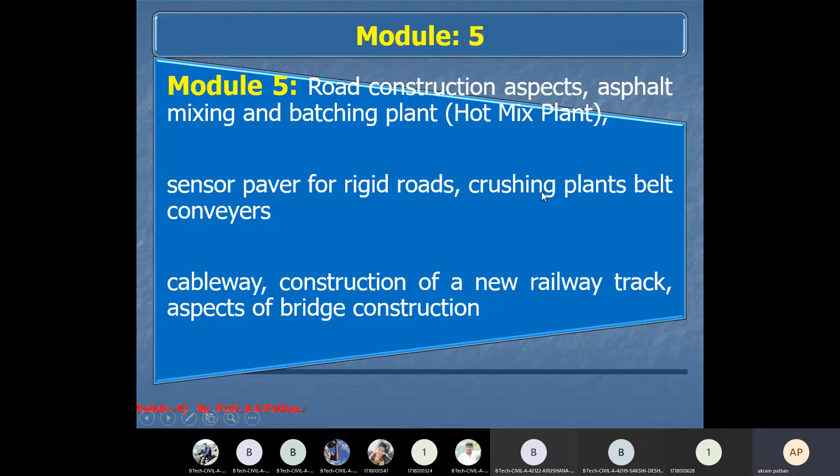I have already mentioned that the highway or the roadway is a system which is constructed above the ground level for the purpose of vehicle transportation.

As far as concerned with the transportation system, a good highway, or any type of national highway, state highway, major district road, other district road, or village road, should have good flexibility from the traffic point of view. There should not be so much obstacle for the traffic.

There should not be a high accident rate on a particular road alignment or the road. As far as concerned with this transportation system, we should follow all the requirements. There should be sufficient signals, sufficient crossing points, and sufficient width of the road systems.

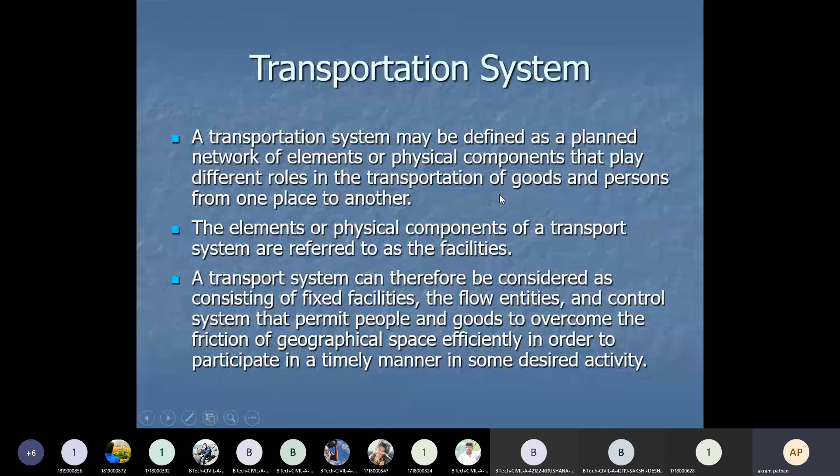Also we have seen that the fixed facility is one of the important aspects we discussed in the morning lecture. As far as concerned with the fixed facilities...

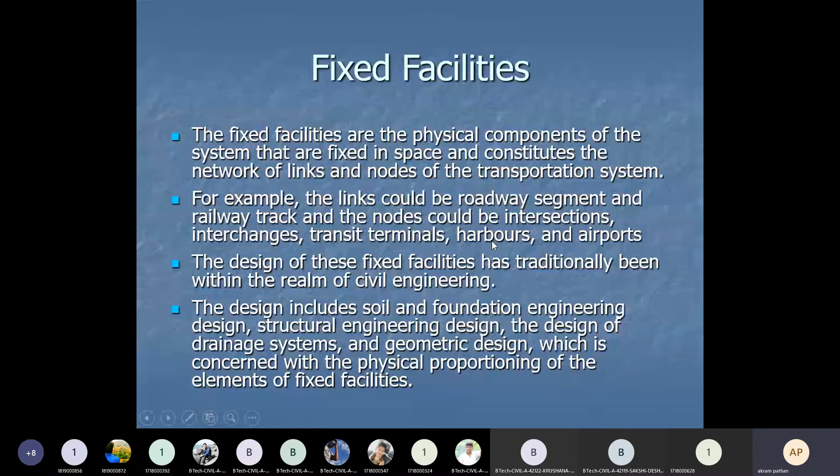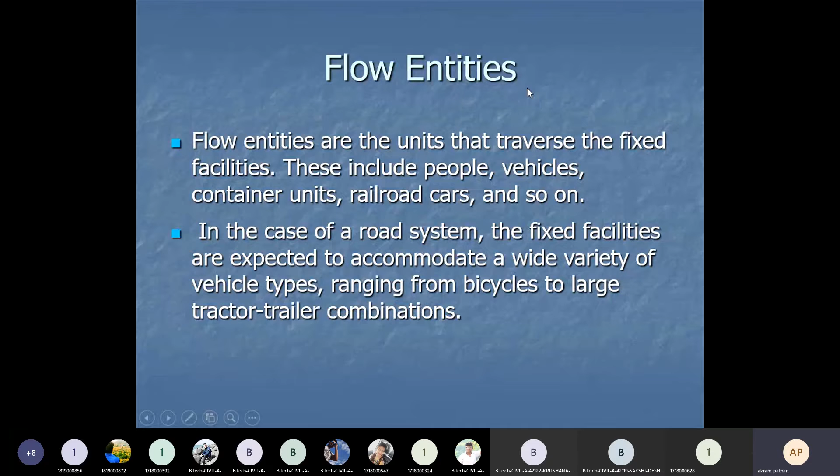Then another important aspect of road construction is the flow entities. We have also discussed control systems.

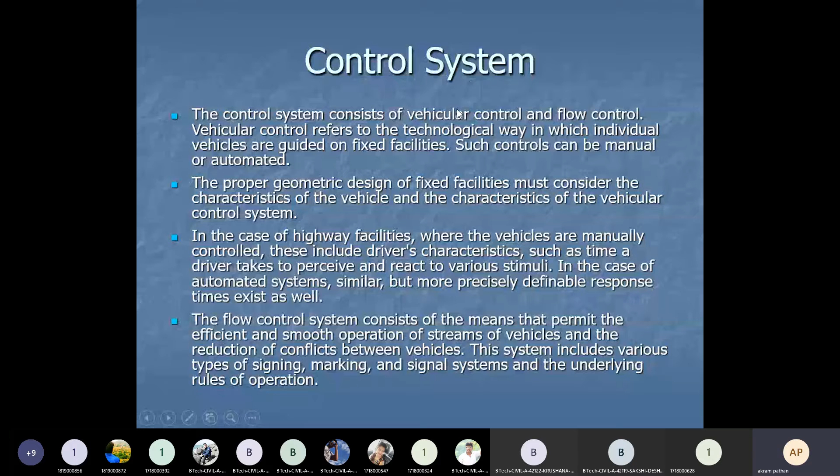In case of the road system, with the help of signals, marking, and signing, and the underlying rules fixed by the National Highway Authority of India, we should follow all the rules and regulations. Another important aspect we discussed in the morning lecture is mobility and accessibility.

Your road network should be accessible from all sources, meaning the road network should be easily accessible from a city area, market area, or any type of commercial or industrial area. So mobility and accessibility is feasible for all users.

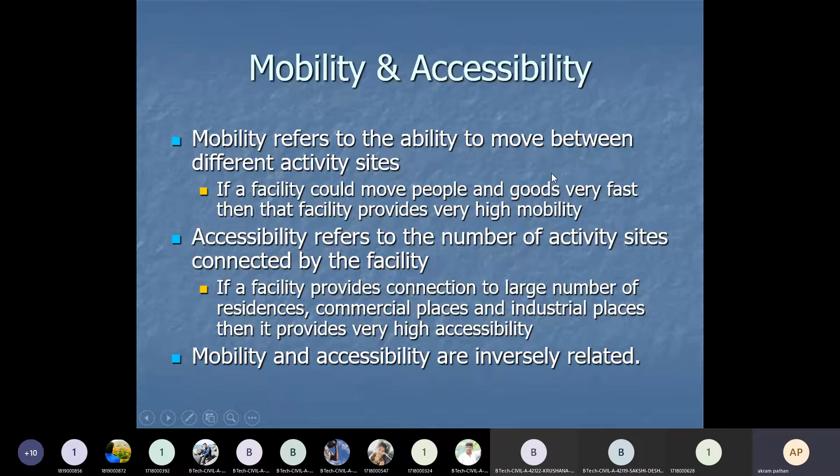Users may be the urban population, or people living in the urban area, who have easy access. Some industries are also accessible. Such aspects should be considered while aligning the road.

We also saw the major transportation systems: highway, railway, airway, waterway, pipeline, and conveyors. These are the 6 major transportation systems.

As far as concerned with highway and railway, or which transportation system we can use, the choice of transportation system generally depends upon 2 to 3 parameters or aspects, such as traveling time and cost or economy.

If you want to reach from origin to destination in very less time, one should go for airways, but that requires more money as compared to highway or railway.

Then waterway, transportation through ships. In case of harbors and docks, ships can stand just as railway stations or bus stands are constructed for stopping of trains and buses. In such a fashion we have docks and harbors where goods are handled and there is a station for ships.

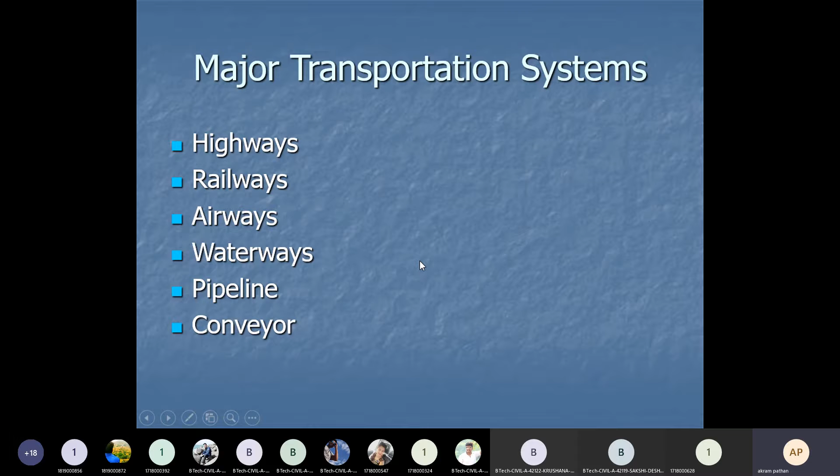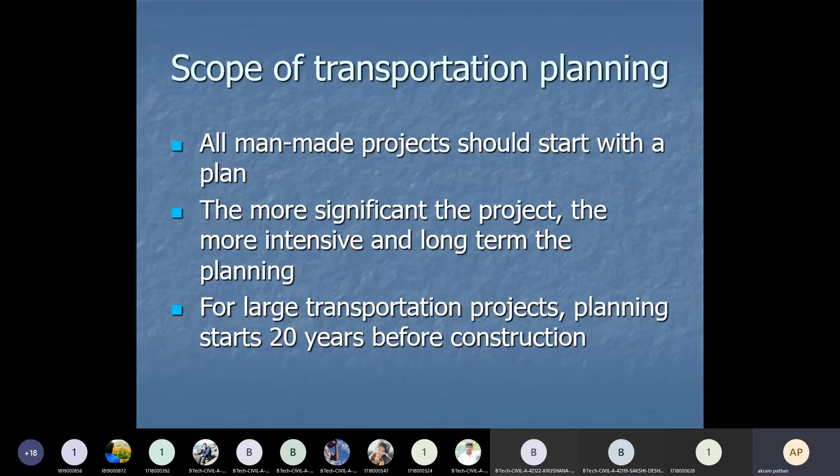The next important aspect regarding road network construction is planning. Planning is one of the important phases we discussed in the morning lecture. These are the processes in the planning phase of any road network. First we should understand the situation where generally we require the road network, and then we should understand the problems.

So what type of problem will be there? The problem is related with land acquisition, or the problem is related with the alignment - on which point the alignment should pass or should not pass. Once the problem is defined, we need to search for the solution depending upon conditions on the field, and then go for analysis of performance and evaluation of alternatives.

So certain alternative planning should be there as far as concerned with the total construction cost point of view. We should have alternatives, and then choice of the project, and then design and construct. So these are the processes we should follow in case of road network planning, and then with other stakeholders what we need to do.

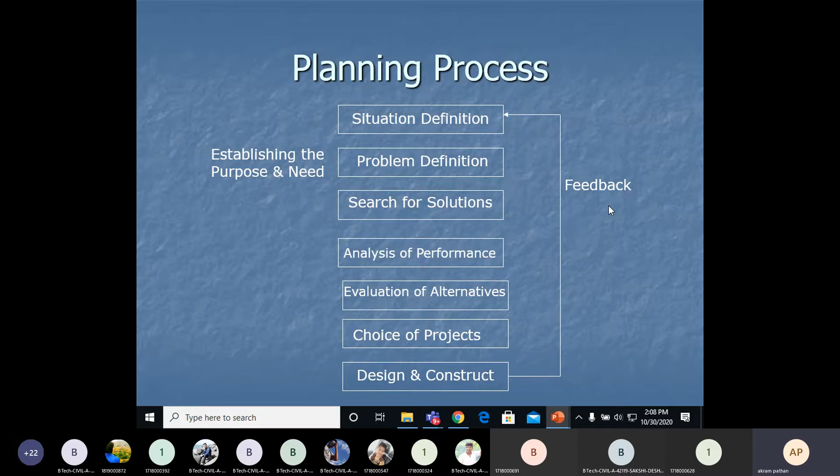Then what we need to do is take the feedback from all the stakeholders - may be the government authority, may be the local agencies. So from that we have to take the feedback, and if you satisfy your feedback for all these planning processes, then the feedback system is very essential for the planning process.

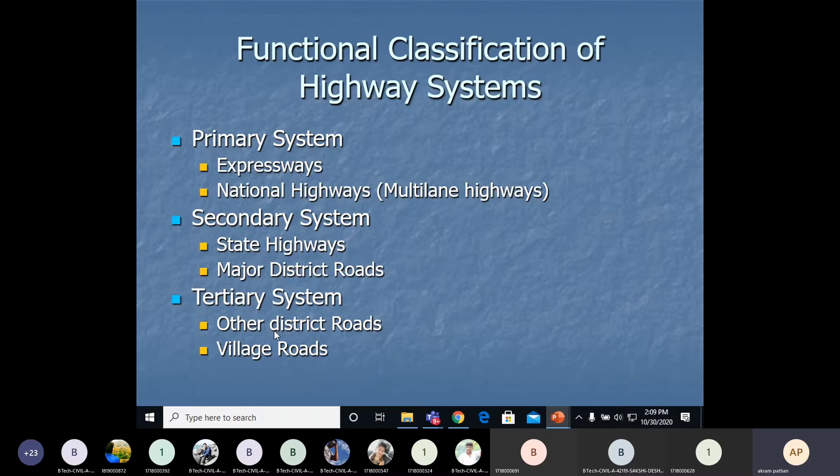Also we have seen in the morning lecture the classifications of highway systems. Basically we have three major systems: primary, secondary, and tertiary systems regarding classifications of highways. As far as concerned with the primary system, we have the expressway, then national highway with multiple lane systems. Then we have the secondary highway, that is the state highway and major district road, and tertiary system which includes other district roads and village roads. So these are the systems of road we should understand first.

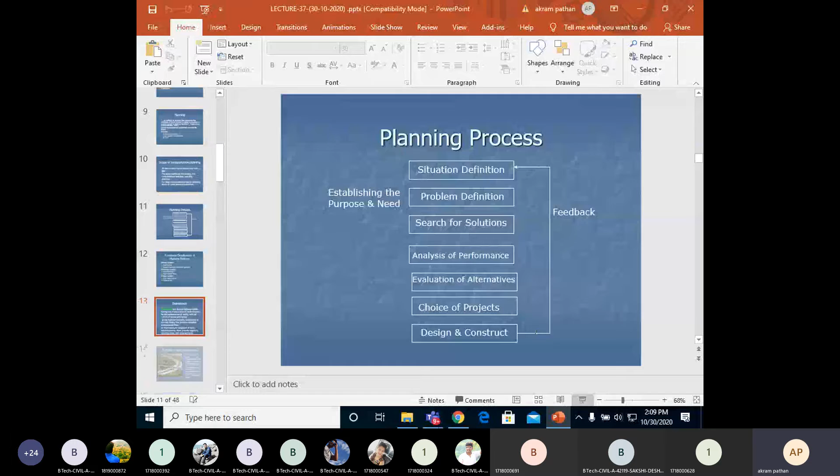Then as far as concerned with the expressway - expressway is a divided highway facility, having two or more lanes in each direction for the exclusive use of traffic with full control of access and egress. In the highway hierarchy, expressway is the only facility that provides complete uninterrupted flow. So such kind of facility will be there in case of the expressway.

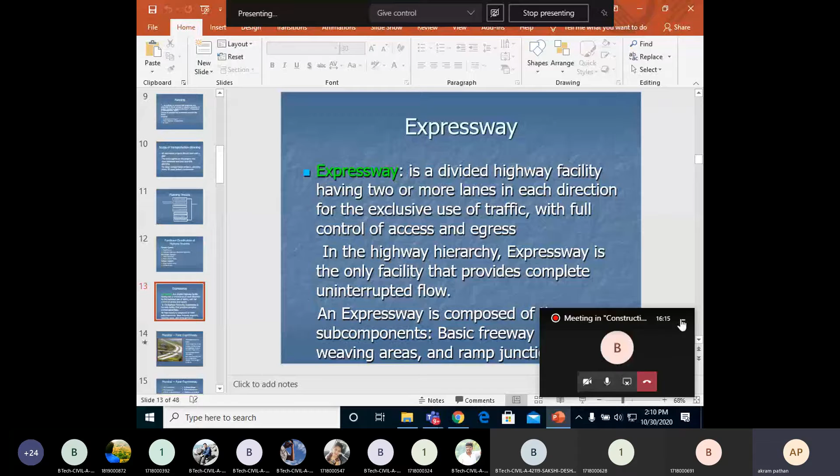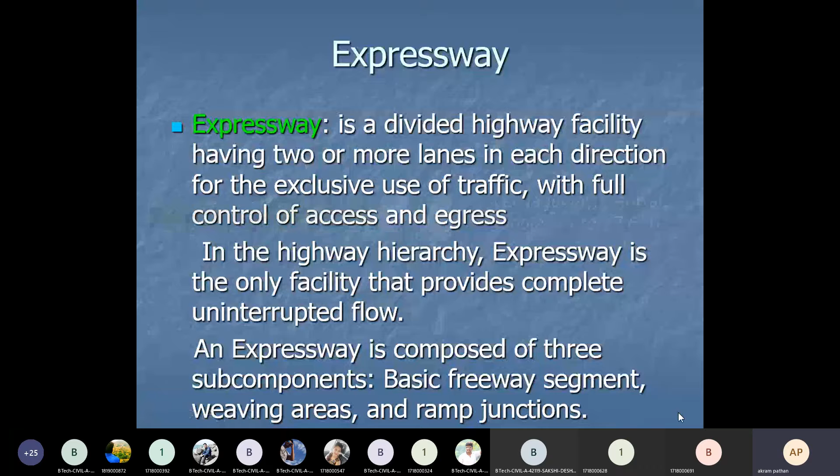We should also understand an expressway is composed of three components: basic freeway segment, then weaving areas, and ramp junctions. So basically in case of the expressway we have three sub-components, and we also discuss regarding the Mumbai Pune expressway. So in front of the Mumbai Pune expressway, these are the various major constructions that will be there in front of the alignment.

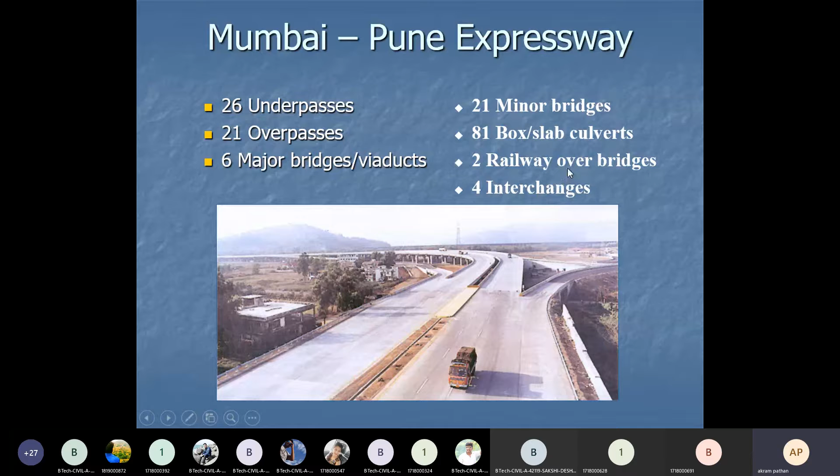There will be 26 underpasses, 21 overpasses. Then 6 major bridges and viaducts, that is the culverts, and 21 minor bridges which are constructed across the Mumbai Pune expressway. Then 81 box or slab culverts. Then 2 railway overbridges we have constructed in case of the Mumbai Pune expressway. Interchanges will be there. So such kind of constructions we should follow in case of any type of expressway. So these are the components of any type of expressway.

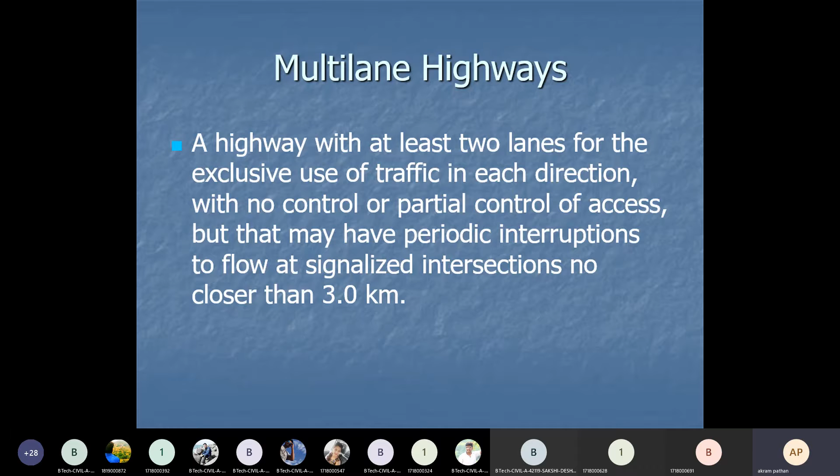Then multi-lane highway. Basically in case of the multi-lane highway, a highway with at least two lanes for the exclusive use of traffic in each direction, with no control or partial control of access, but that may have periodic interruptions to flow at signalized intersections no closer than 3 kilometers. So in case of multi-lane highways, at least two lanes should be there, and intersections no closer than 3 kilometers. So at the junctions we should follow signalized systems, we should follow intersection systems, and this is no closer than 3 kilometers.

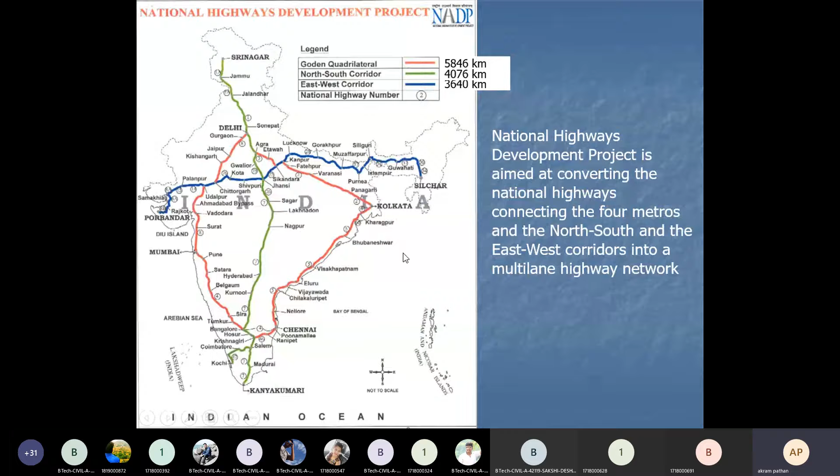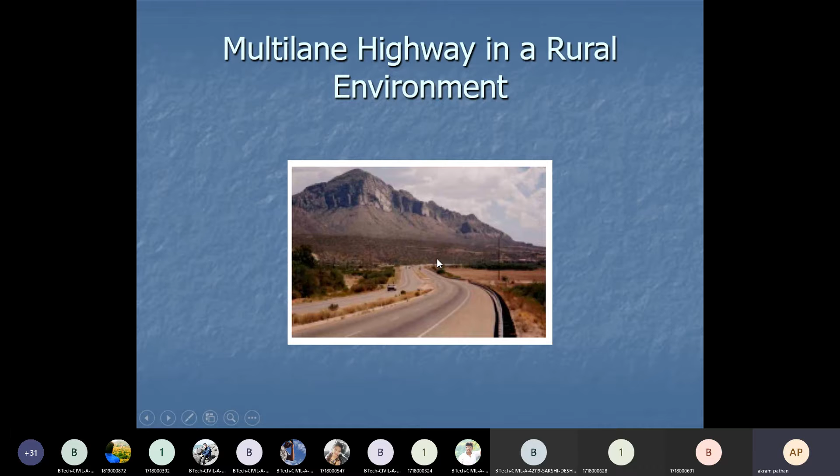As far as concerned with the multi-lane highway, it is going on in a rural environment also. In case of hilly areas, the multi-lane highways go through the hilly areas also. Then see here the suburban environment. This is the picture showing the multi-lane highway in a suburban environment.

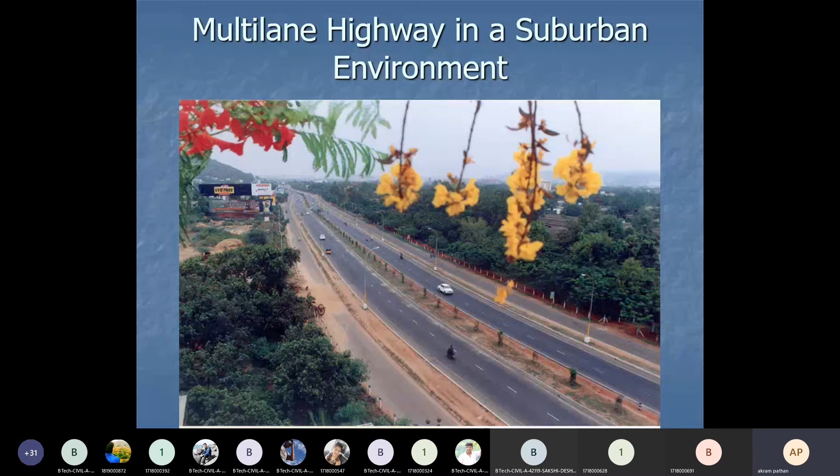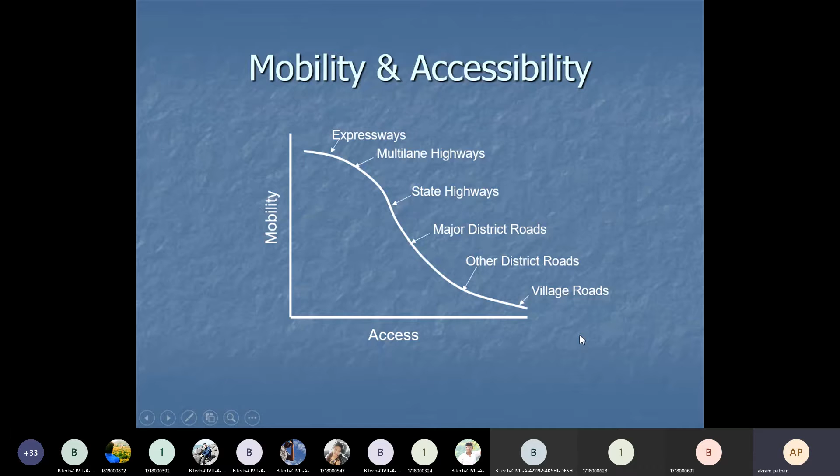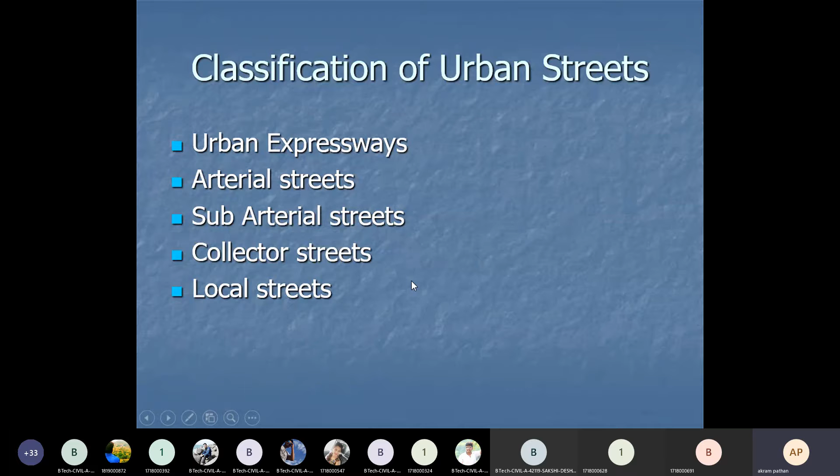Then we should also understand the classifications of the urban street. In urban areas, we have classified urban expressway, arterial street, sub-arterial street, collector street, and local street. So the urban street is classified into types of road networks in the urban areas.

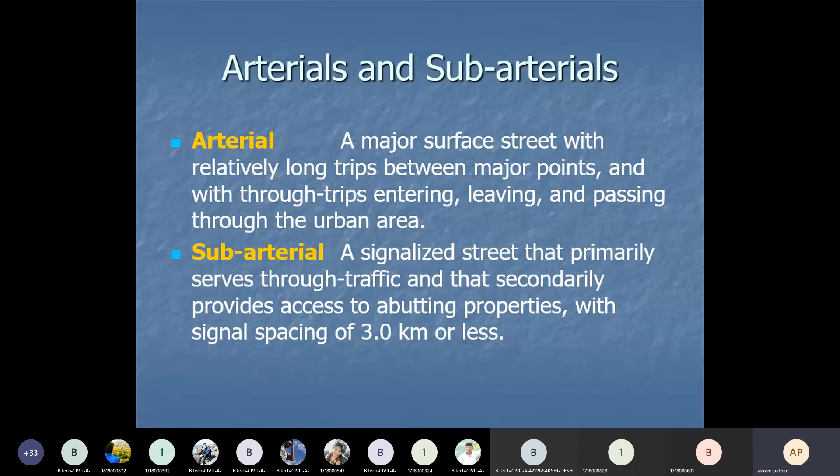Then we should also know about collector and local streets. As far as concerned with the collector street, it is a surface street providing land access and traffic circulation within residential, commercial, and industrial areas. The function of the collector street is to collect traffic from local streets and feed into the arterial and sub-arterial streets, or vice versa. The access is generally provided within residential, commercial, and industrial areas.

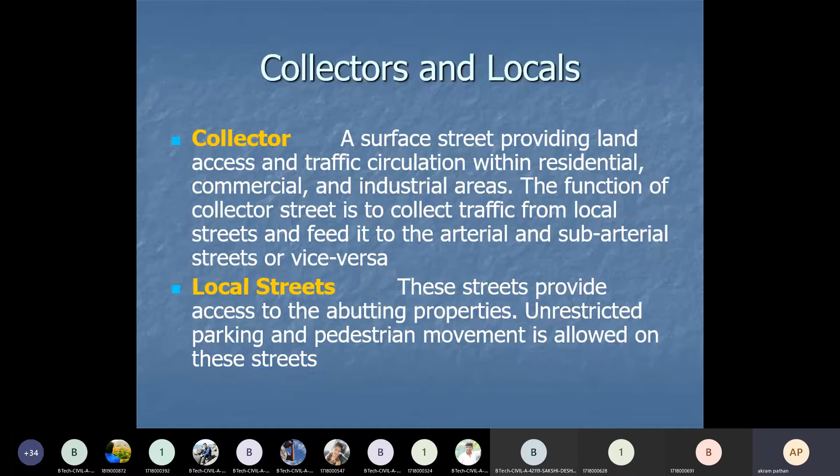As far as the local street is concerned, these streets provide access to abutting properties, with unrestricted parking, and pedestrian movement is allowed on this particular street. Pedestrian means people walking on that street. Such a street is known as the local street.

Then level of service will be there. We have categorized the urban street into class 1, class 2, class 3 and class 4. It's a qualitative measure describing operational conditions within a traffic stream based upon service measures such as speed and travel time, freedom to maneuver, traffic interruptions, comfort and convenience.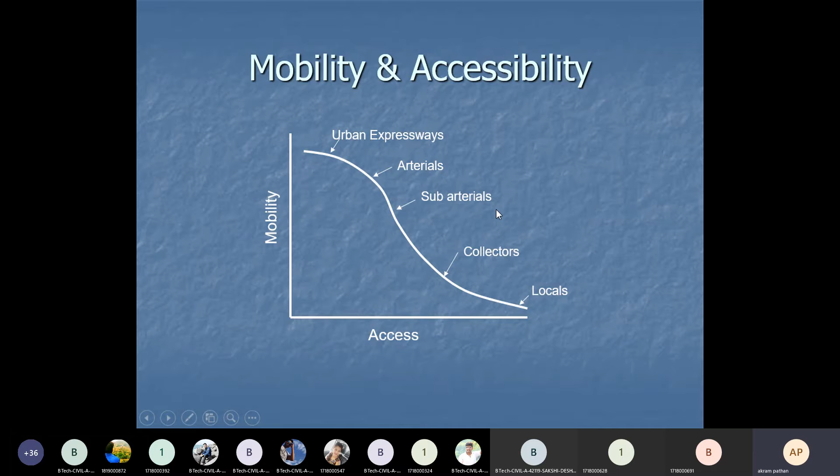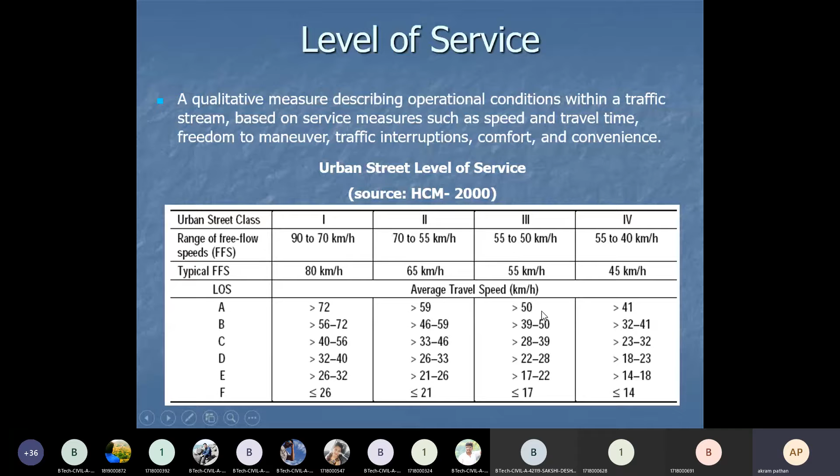Depending upon the national highway, state highway, major district road, other district road, or village road, the thickness and camber and all the geometry of the highway element changes according to the classification of the road network.

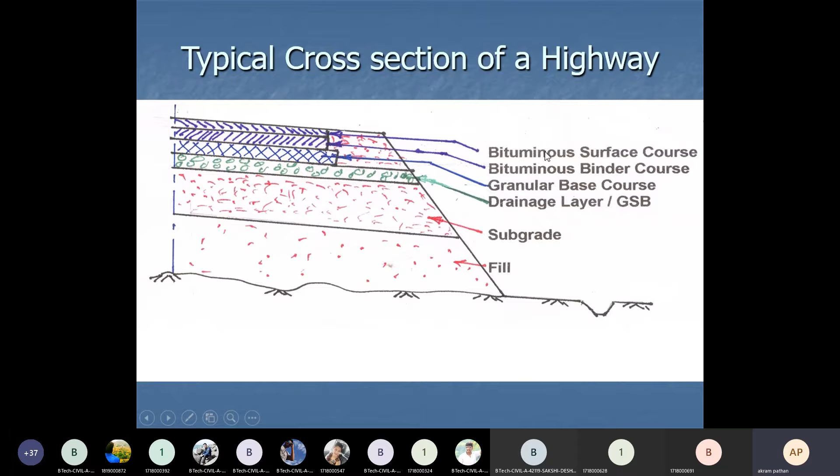So which type of material is generally used for the compaction of the subgrade? Which type of material is generally used to fill the drainage layer, sub base course, base course, or the wearing course?

As far as these four elements are concerned, these are very wide areas, but in our subject only the aspect will be covered, not in depth—though we should understand various aspects whatever this slide is going to cover. This is very important as far as the first part of our subject is concerned, but not in depth. Geometric design is a very wide area which you will cover in infrastructure engineering, but as far as the depth of our subject is concerned, you should understand the various aspects we should consider in case of the road network.

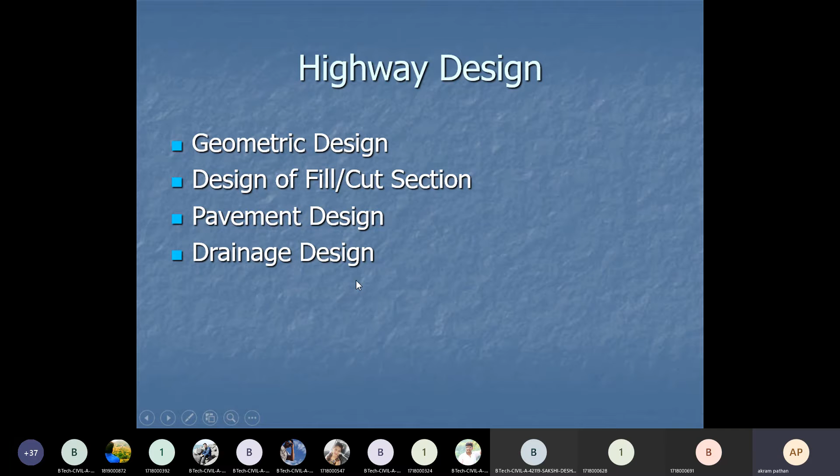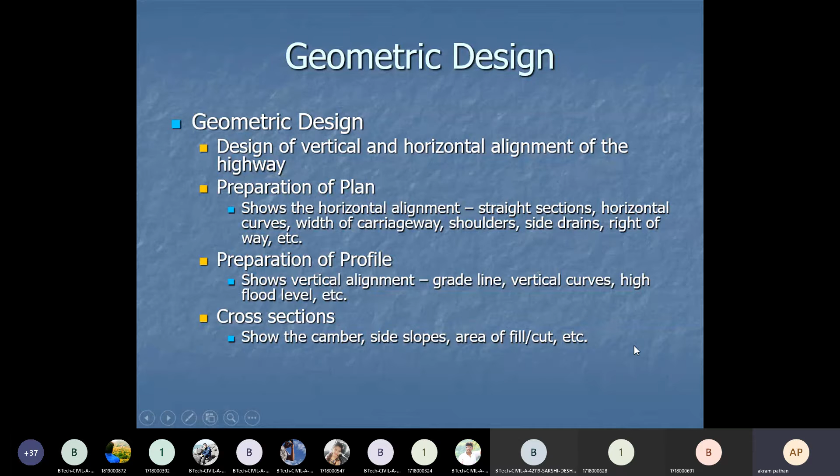So these are the considerations we should follow in case of the geometric design of the highway. As far as concerned with the geometric design, these are the elements we should look into in detail. Then this is a cross section.

This is the alignment. We need to do the survey. We need to mark the positions on the ground network or the ground level, and then we need to draw the cut and fill, and then we need to draw layer by layer, that is the subgrade, base course, and the wearing surface.

So whatever sheet we have developed, or we have constructed, in case of the survey, you can say the highway design and cross section in surveying follows the same method as the preparation of the cross section of the highway.

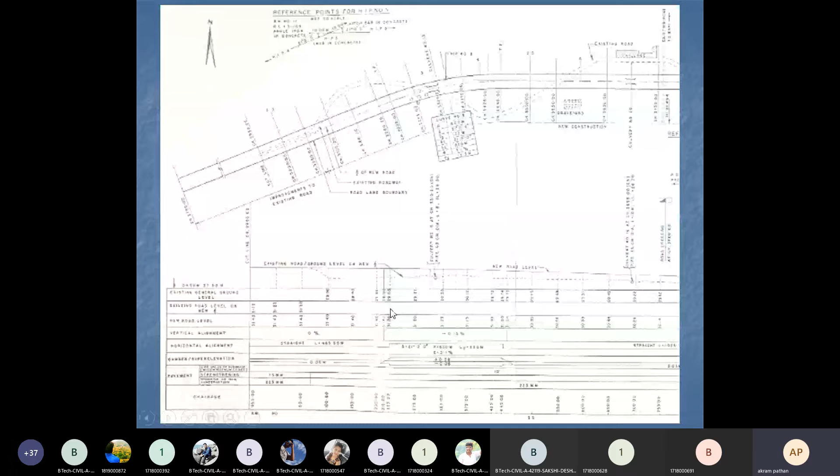Then look at this, we also draw such type of cross section. We have the road level, these are the depths, and this is the carriageway, this is the camber we have kept for drainage of rainwater from the entire area.

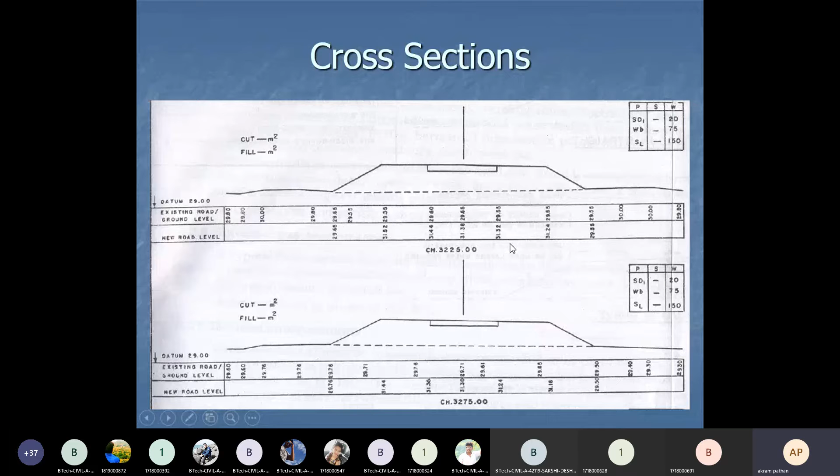So this is known as the carriageway. Carriageway means on which the vehicle may run. So such type of cross section we should understand, we should develop, we should follow.

Then another important aspect we should understand is the pavement design. Pavement design means fixing the thickness of each layer of the pavement. We have the soil subgrade, base course, and the wearing surfaces. So for each layer we should design the thicknesses, that is known as pavement design.

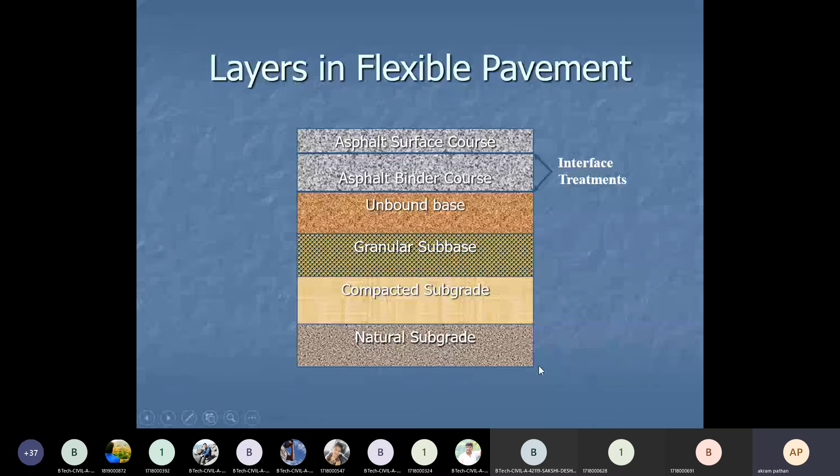So depending upon the axle load, depending upon the vehicles running per day over 24 hours, if you follow that design philosophy, then once you have the load, you can design the thickness of all the courses for the flexible pavement.

Then how the methods of pavement design will be there. This is the flow chart we should understand in case of any type of pavement design. First we need to assume the pavement configurations, that is the loads coming from the vehicles.

Once we understand the analysis of the load from the vehicles, we have to first categorize and understand the types of road network. Once you understand which type of road network we are going to construct, that is national highway, state highway, major district road, or village road, then we need to calculate the load.

Once we have the load, we have to configure each layer, then compute the pavement response using the structural model. In case of structural models, we have different types: analytical model and experimental model will be there.

We need to input certain values: the material property and the axle load coming from the vehicles. These are the two inputs required for any kind of structural model. Once we input these two parameters, we go for the next step: compute the allowable number of repetitions of the standard axle using distress models.

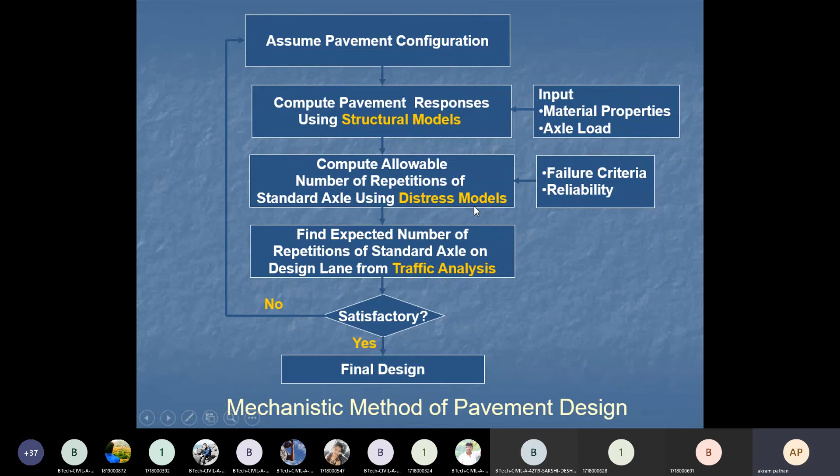All the parameters change according to the wheel load, depending upon the elasticity and Poisson's ratio of the materials, and the thickness H1, H2, H3, H4 and H5. How the material property changes depending upon the wheel load should be analyzed, and that is known as the structural model and distress model.

This kind of characteristic of the layer under the wheel load is first analyzed, then the axle configuration: we have the single axle with single wheel, and the single axle with dual wheel. The legal axle load is 10 ton, and for the single axle with single wheel it is 6 ton.

In case of the tandem axle, we have double axle, with dual wheel for each axle; that is known as the tandem axle, and the legal axle load is 18 ton... wait, for three axles each having dual wheel, the legal axle load is 24 ton. Depending upon this axle configuration, we need to do the load calculations.

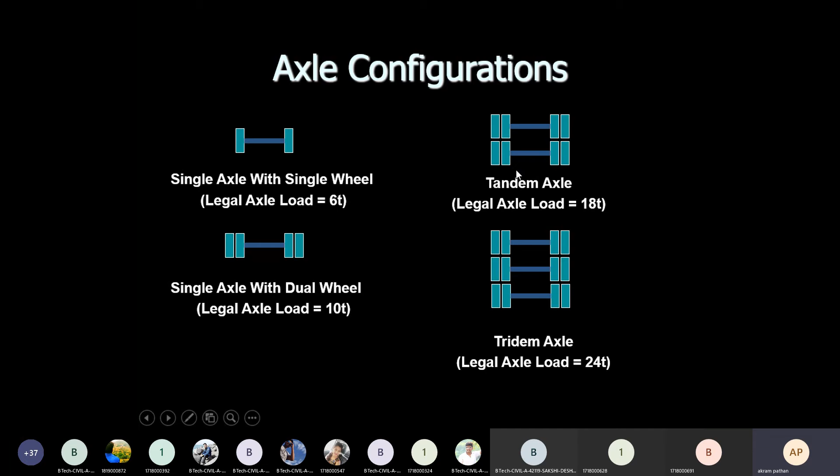Then the truck configuration: this is a two axle truck, one axle and another axle. For the front axle there is a single wheel, but for the rear axle there will be dual wheel, dual tire.

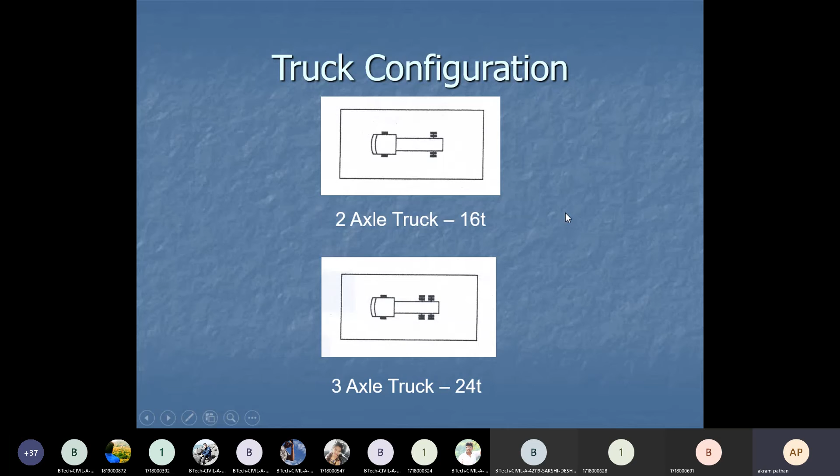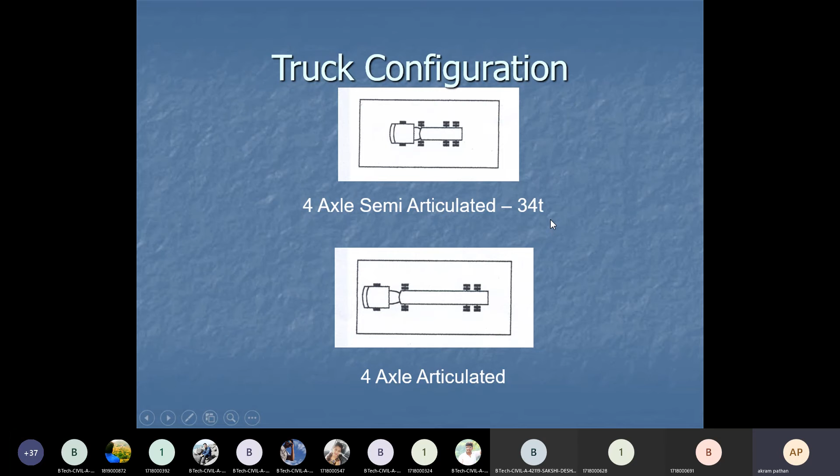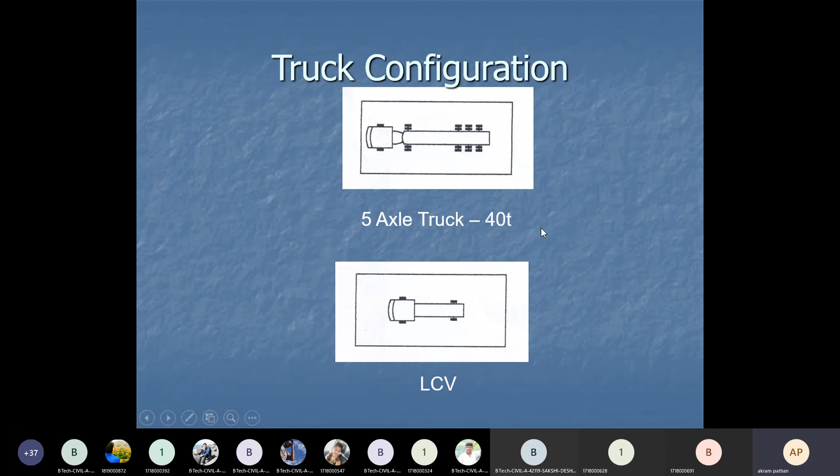In case of the 34-ton 4 axle, and the 4 axle articulated (this is semi-articulated and this is articulated), for both cases we should consider 34-ton axle load. Now in case of another truck configuration, that is the 5 axle truck, we should consider 40 tons as the axle load.

Then the standard axle: a single axle with dual wheels carrying a load of 80 kilonewton is defined as the standard axle load. So 80 kilonewton load is known as the standard axle load.

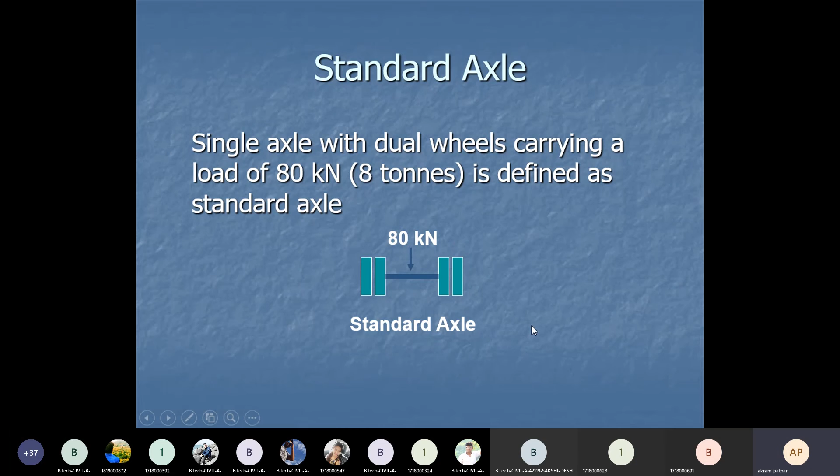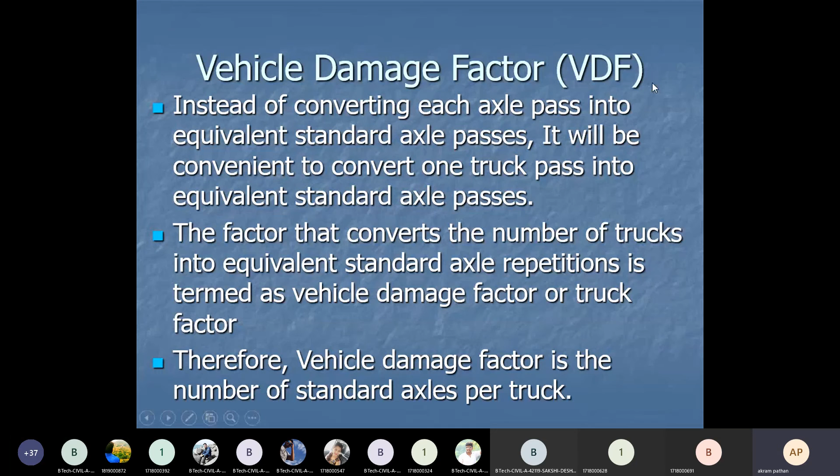Then the vehicle damage factor is another parameter we should consider from the highway construction or road construction aspect, that is the VDF. Instead of converting each axle pass into equivalent standard axle passes, it is convenient to convert one truck pass into equivalent standard axle passes. The factor that converts the number of trucks into equivalent standard axle repetitions is termed the vehicle damage factor or truck factor. Therefore, vehicle damage factor is the number of standard axles per truck. This is one of the important aspects from the road network point of view.

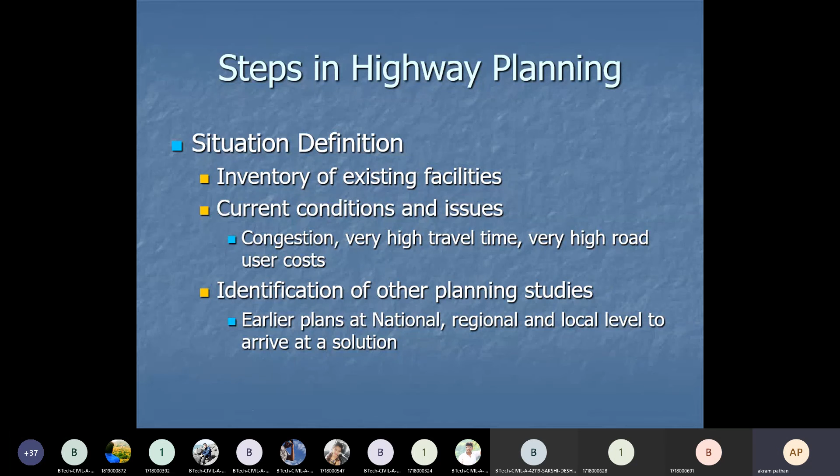Then the steps in highway planning. While highway planning, which steps should you follow? Situation defining, then inventory of the existing facilities. Then current condition and issues, then congestion, very high travel time, very high road user cost, and identification of other planning studies. Then earlier plans at national, regional and local level to arrive at a solution. These are the steps we should follow in the planning process.

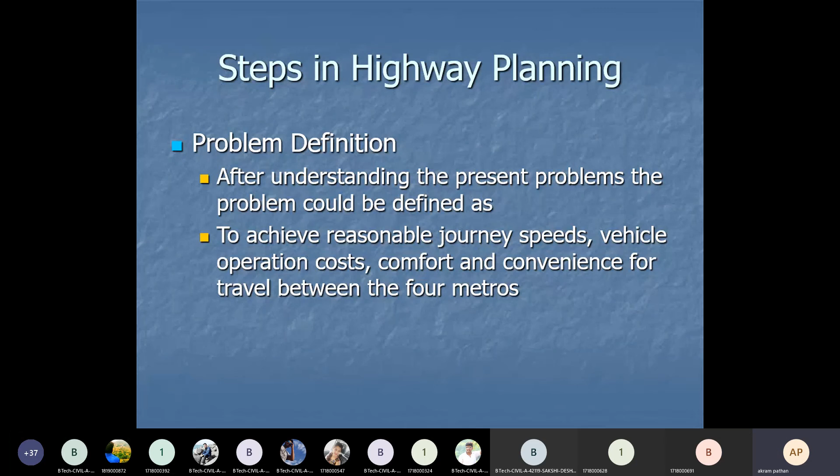Problem definition is the first step. After understanding the present problem, the problem could be defined as: achieve a reasonable journey with higher speed, vehicle operation cost should be minimum, and we should satisfy comfort and convenience for travel between the 4 metros or between the origin point and the destination point. Such kind of problem definition we keep in mind.

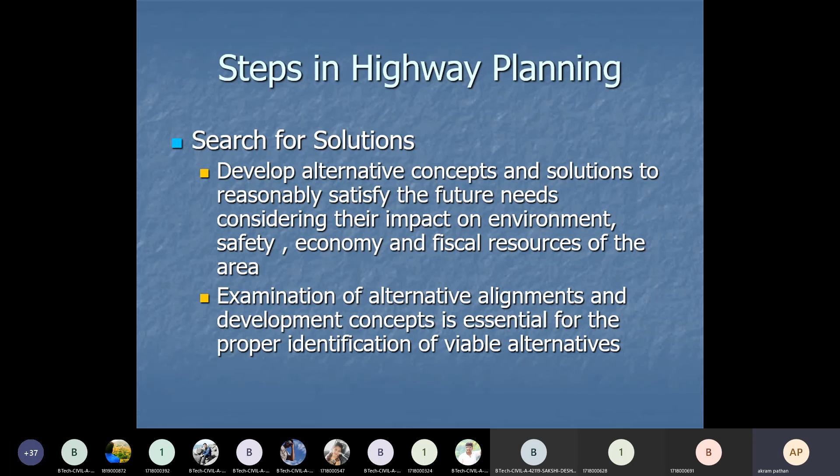Then another important step is the search for solutions. Develop alternative concepts and solutions to reasonably satisfy future needs, considering their impact on the environment, safety, economy and fiscal resources of the area. Then examination of alternative alignments and development concepts is essential for proper identification of viable alternatives.

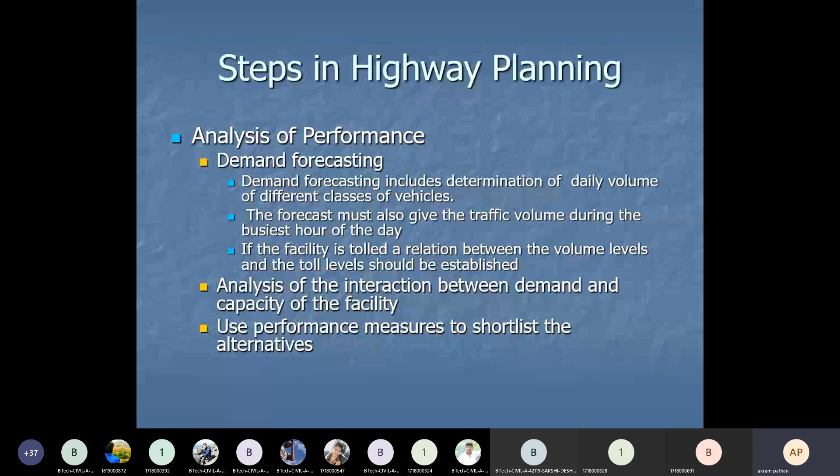Then the next step in planning is evaluation of alternatives. As far as economic feasibility is concerned, conduct economic evaluation for the shortlisted alternatives. Each alternative may be compared with the do-nothing alternative, meaning there should be a number of alternatives, and benefit and cost for each alternative need to be worked out.

The benefit cost ratio should always be greater than 1, it should not be less than 1. Benefits include savings in travel time, reduction in operation cost, reduction in accidents, etc. Costs include capital cost of construction, maintenance cost, and environmental cost.

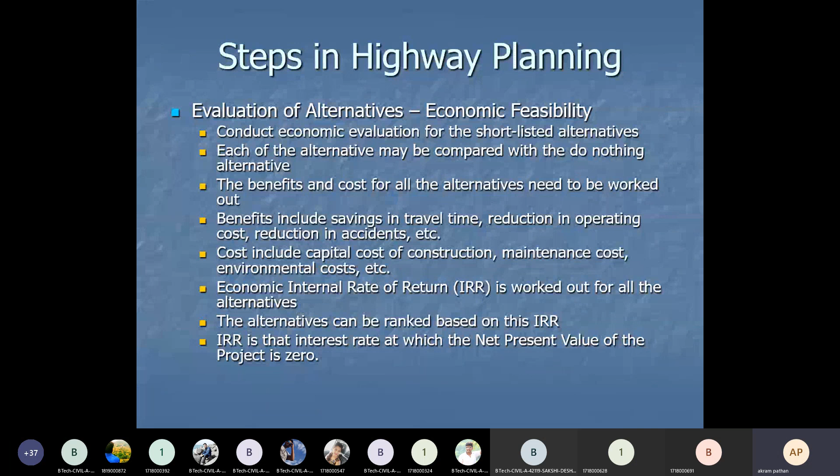The economic internal rate of return, that is IRR, is worked out for all the alternatives. The alternatives can be ranked based on the economic internal rate of return. The IRR is the interest rate at which the net present value of the project is zero.

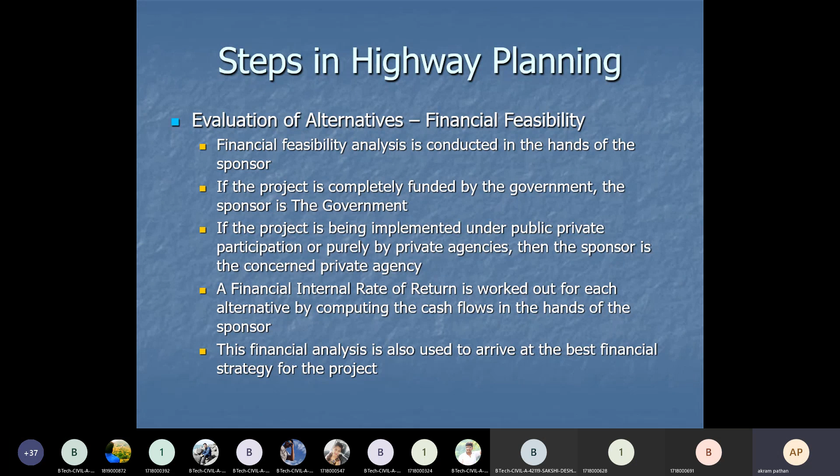Then financial feasibility is also conducted on behalf of the sponsor. If the project is completely funded by the government, the sponsor is the government; if the project is implemented under public private participation (PPP) or purely by a private agency, then the sponsor is the concerned private agency. A financial internal rate of return is worked out for each alternative by computing the cash flow in the hands of the sponsor. This financial analysis is also used to arrive at the best financial strategy for the project.

Now, as far as the environmental impact assessment is concerned, we will stop here for today.